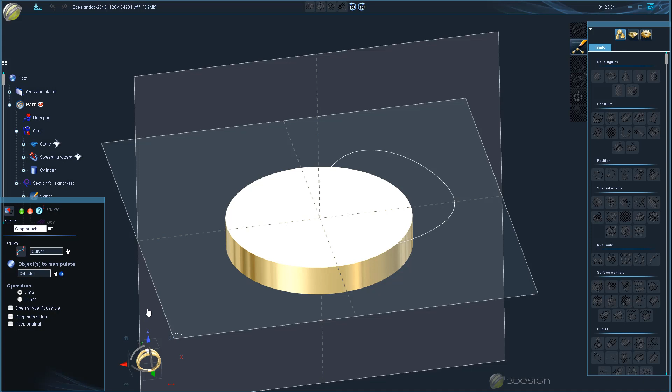Basically, you can launch the tool with nothing selected and then plug in a curve. And the same rules apply for extrusions. This needs to be a closed planar curve so that you do get a solid object from it so that it will Boolean properly. So no open curves and no non-planar curves. And then I'll plug in my object, which is any object that I want to cut. And we choose crop or punch.

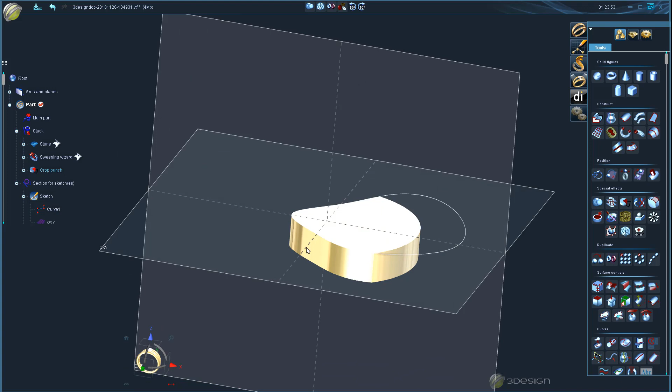So a crop, let's go ahead and validate that, is going to cut away what's inside your closed curve. We'll undo that, and I'm going to pre-select this time. I'll select the curve and the object and do a punch. Okay, so you get the opposite effect. That would be a Boolean intersection between the two objects created from the crop and punch extrusion.

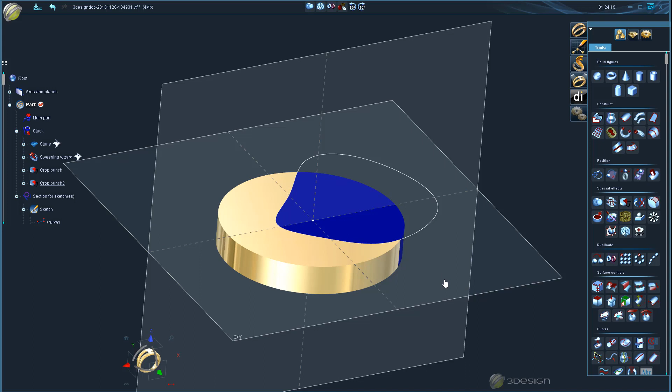Okay. Now, one thing it does that you can't do with just a regular Boolean without doing a couple steps is to slice this into two parts. So we're going to do a crop and punch. Only it doesn't matter crop or punch. I'm going to do keep both sides. And you see that it will do both a subtraction and an intersection all in one step. So this is another really nice shortcut if you are creating these objects where you want two parts to fit together nicely.

Finally, the one I get the most questions about at the support desk is, what is this open shape if possible? So it works with crop or punch. I'm going to crop it, click on open shape if possible. Basically, this is going to remove the faces that are touching the inside of your curve.

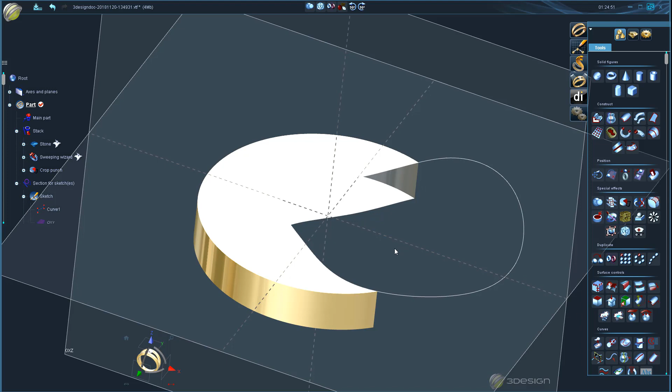It does say if possible. It doesn't always work depending on what shapes you drew or what objects you're trying to cut. But if it's able to, it will go ahead and remove the face as well, creating a non-solid object or a surface object. So may be useful for some of you. So that's pretty much it.

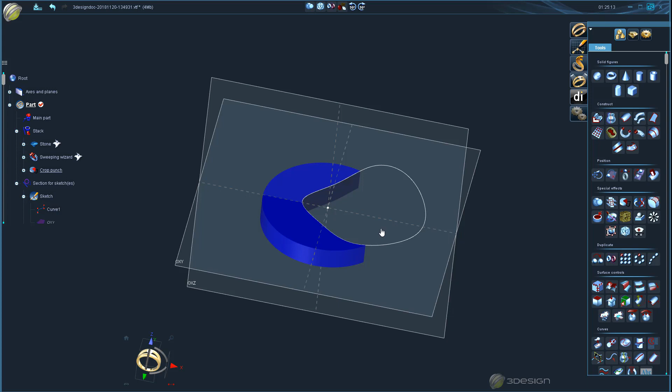Trim to finger size is basically just a crop and punch, but instead of using your own curve shape, it uses a ring size builder. That could already be built into a ring, or it could be just selecting the ring size itself. So let's take a look at that. Let me hide these.

Before we get into that, I want to show you that you can just use a regular crop and punch using a finger size builder as well. So let me show these objects. I just have a band swept here. I've got a stone and a ring size builder.

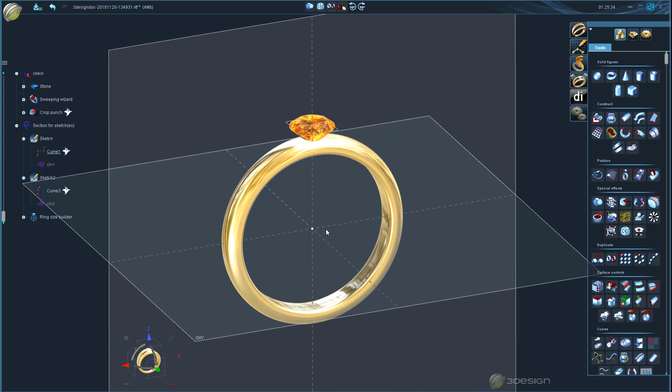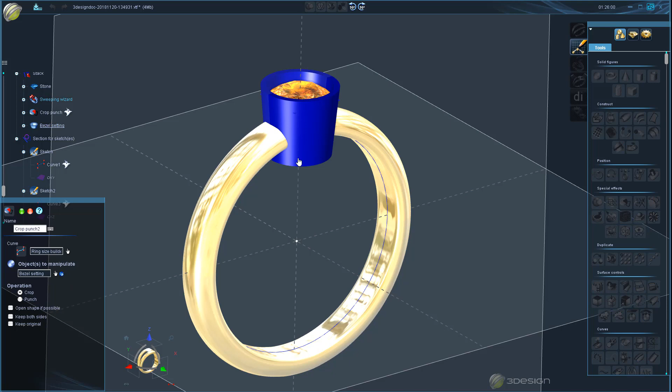So for example, I want to create a bezel, and bezels by default are flat on the bottom, and you may want to cut off some of that excess and make it match the shape of your finger, so round. So you can select the object and the ring size builder, and using just a crop and punch, you can crop off the inside of that circle. So validate that, and we get the crop and punch.

Now you want to be very careful if you select the ring size builder and then the object and launch crop and punch. Let me do that the other way. Select the object and then the ring size builder. You'll see that it mixes up, and because that's technically not a curve, it confuses the input here, and it puts the bezel in the curve section instead of the ring size builder.

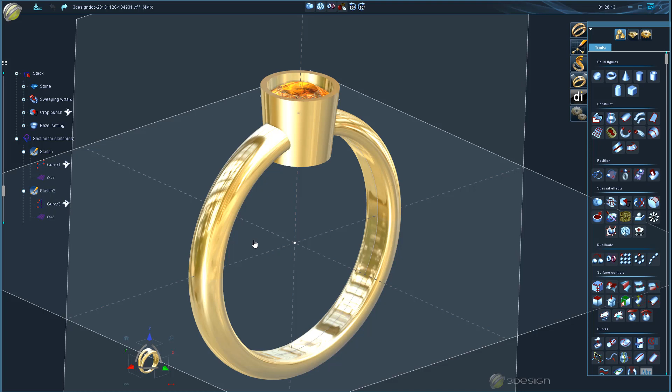So if you ever validate your crop and punch using a ring size builder and your object disappears like this, know that that's what's happened. So just reselect and do the ring size first and then the object, so that they are in the correct order here. So that's all that happens there.

So to avoid that, if you are cropping with just the ring size builder, instead you can switch over to the jeweler's bench, and down here is the trim to finger size tool. So this does the exact same thing. It's only going to crop what's inside your finger circle. So you can build things that kind of overlap into the inside of your finger and then just trim away those excess parts.

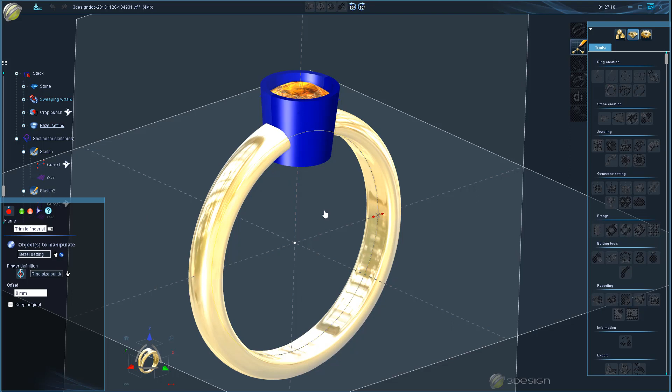The other neat thing you can do here is an offset, either positive or negative, and you can offset this curve by a certain amount so that it doesn't crop it at exactly the same level as your finger circle. So this is also a shortcut for offsetting the curve and then cropping and punching it. So a great little tool.

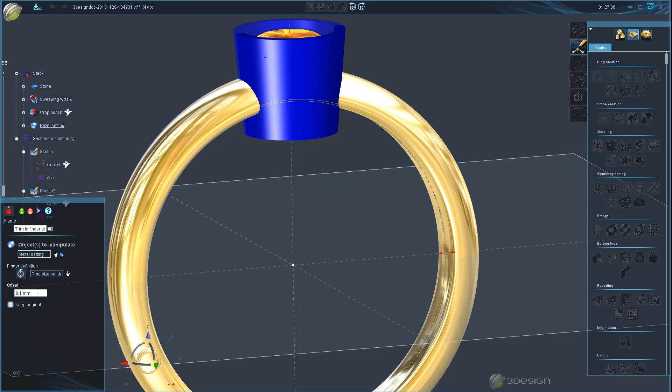Like I said, it doesn't do anything new or different. It's just a really nice shortcut if you want to quickly crop it, and especially if you want to offset it a little bit. So for example here, we don't want the Boolean to cause problems with having two surfaces exactly the same. So that's it.